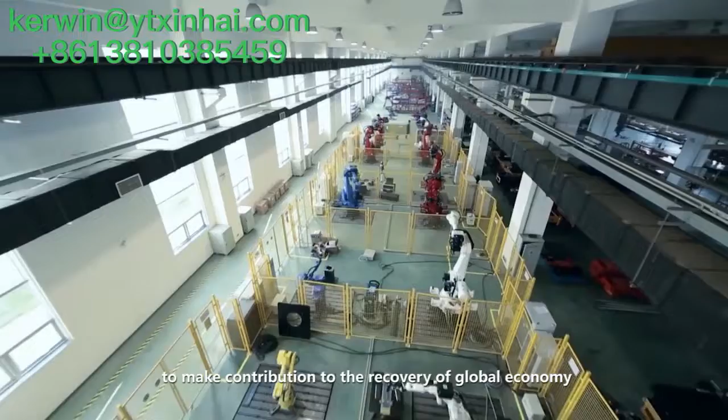The manufacturing sector across the world is continuing to make contribution to the recovery of the global economy. Shandong Xinhai Mining Technology and Equipment Incorporated is a leading player providing EPC services to mines in China. It has expanded its business to set up branches in a number of countries, such as Indonesia, Iran, Sudan, Tanzania, Zimbabwe, and Peru, offering tailored solutions to clients from over 90 countries and regions.

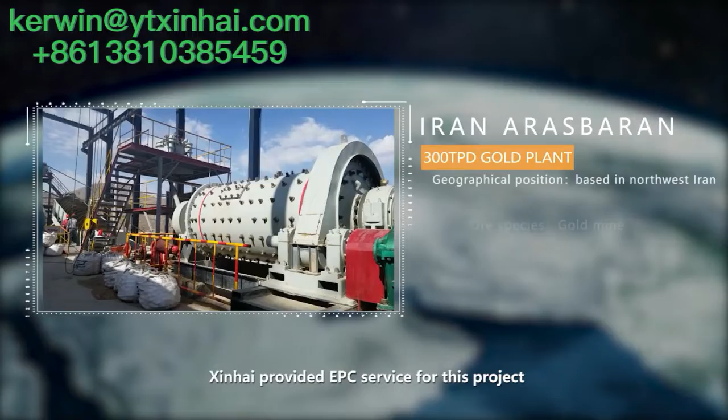Arasbaran Gold Mine, based in Northwest Iran, was one of the project's foreign clients who were fascinated by Xinhai's overall mine service system. Xinhai provided EPC service for this project, from mineral processing test, mine design, equipment manufacturing, package and shipping, installation and commissioning, to workers' training.

In a few rounds of talks, Xinhai's staff set out the project development to the client, including the mineral processing technology, construction conditions, project duration and cost estimation. Thus, the client comprehended how to construct the plant and generally knew the investments and benefits.

Through multi-element analysis and screen analysis on the client's raw ore samples, Xinhai Mining Research Institute recommended two technical processes: stage grinding, one-stage gravity concentration and stage flotation; and stage grinding, stage gravity concentration and stage flotation.

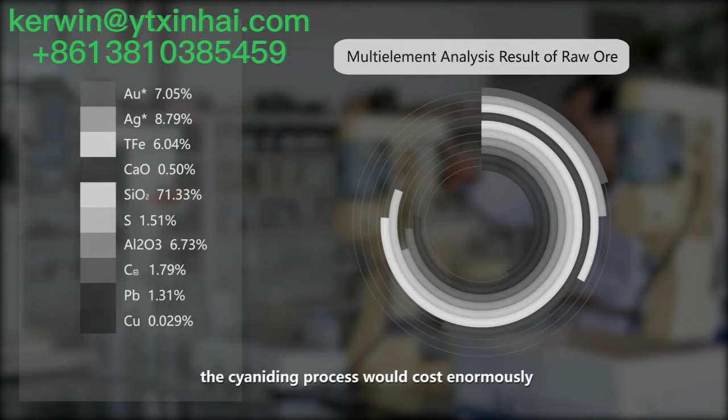As the ore of this mine belonged to sulfide ores, the cyaniding process would cost enormously. In addition, the use of toxic sodium cyanide would be harmful to production and environment. Compared with that, the flotation process could easily be handled and would use safe and environment-friendly agents.

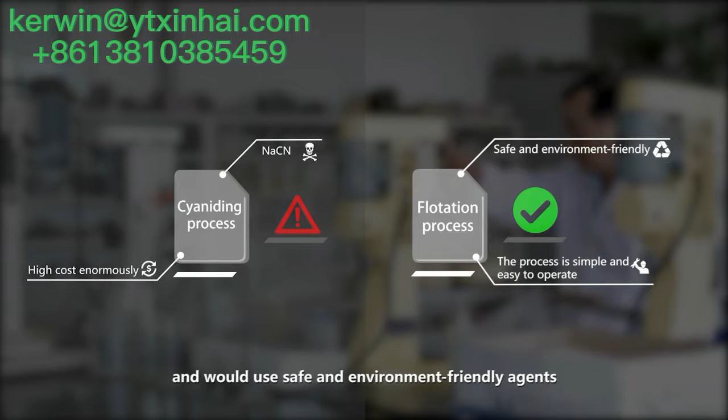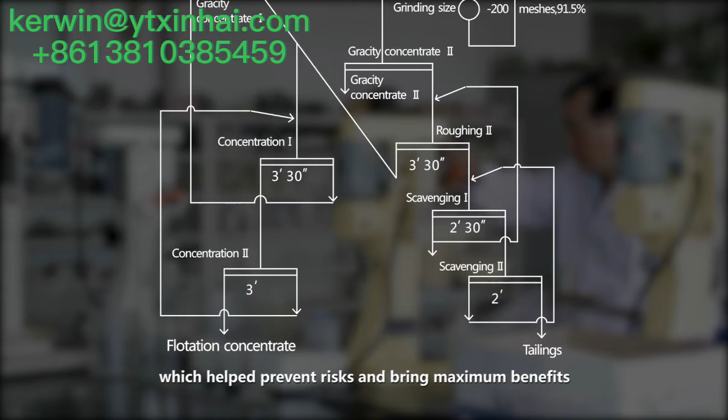As a result, Xinhai adopted the process of stage grinding, one-stage gravity concentration and stage flotation for the client, which helped prevent risks and bring maximum benefits.

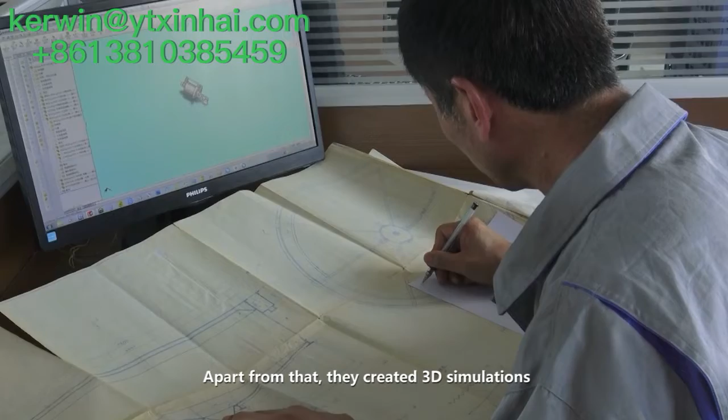To ensure that the mineral processing plant was in a perfect state, technicians of the Xinhai Mining Design Institute made strenuous efforts to design construction drawings based on the mineral processing flow, equipment model selection, plant terrain, and others. Apart from that, they created 3D simulations in order to offer proper mine design proposals and optimal industrial designs to the client.

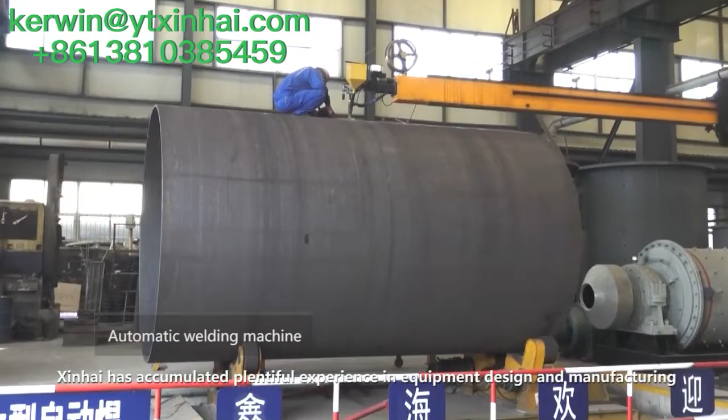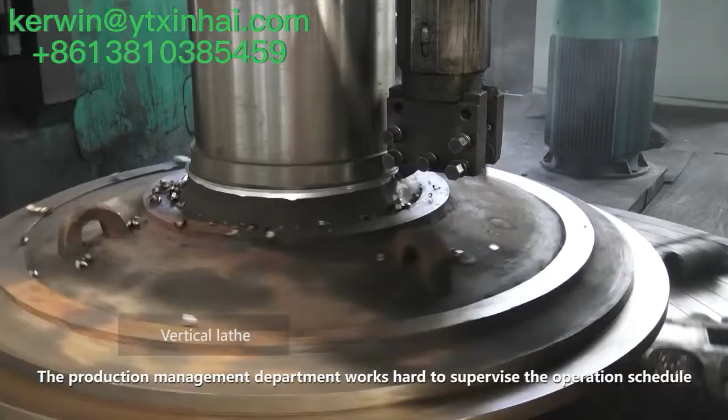Over the past 20 years, Xinhai has accumulated plentiful experience in equipment design and manufacturing, while growing at a steady pace and focusing on research and development. The Production Management Department works hard to supervise the operation schedule so as to guarantee high-efficiency production.

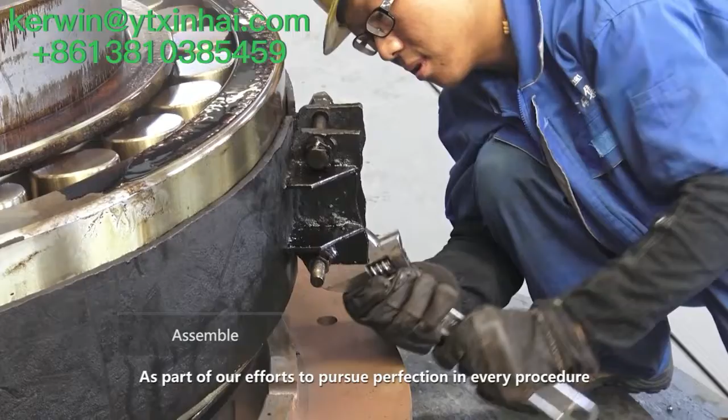As part of our efforts to pursue perfection in every procedure, all the metal materials entering the factory are treated by sandblasting and rust removal prior to manufacturing.

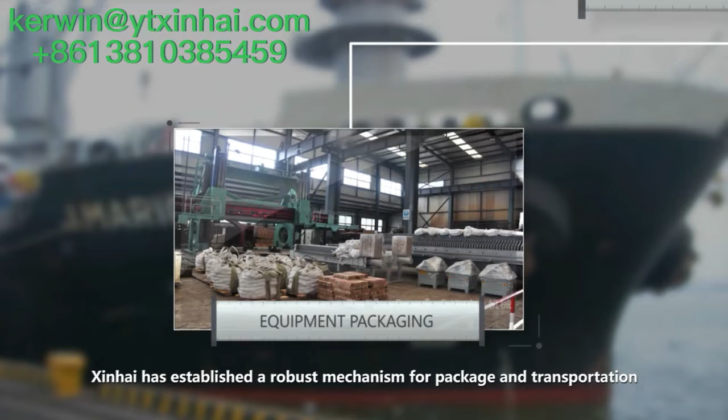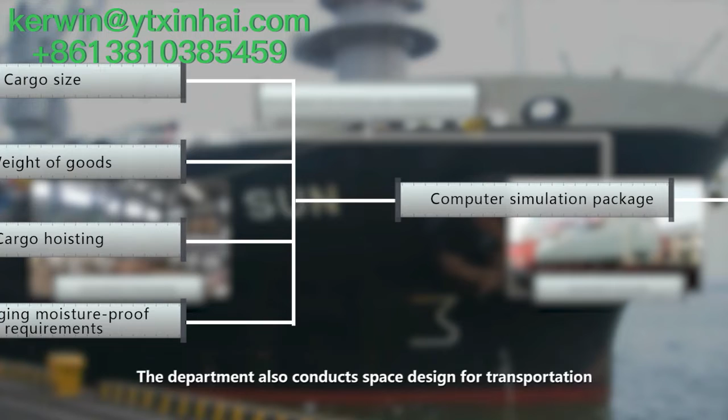Xinhai has established a robust mechanism for package and transportation. Its logistics department uses computers to simulate the condition of the package on the basis of size, weight, lifting, and damp prevention of cargoes. After that, the goods are sorted and packed. The department also conducts space design for transportation so as to reduce the transportation costs.

This ensures that equipment and spare parts are in safe and sound conditions, and facilitates field management and installation. Given the fierce competition in the mining industry, the success of Xinhai in keeping growing its business lies in its high quality and client-orientated services.

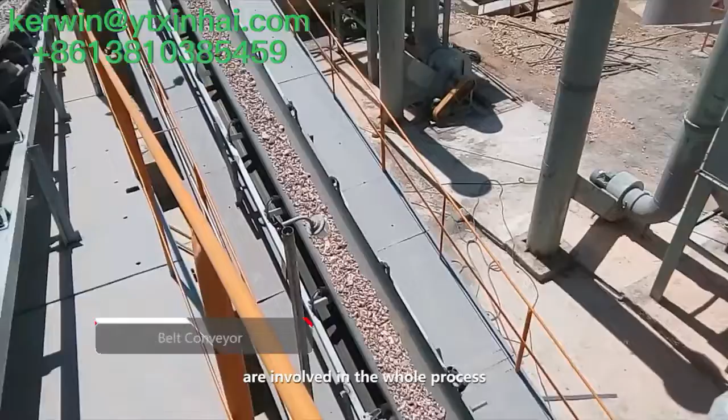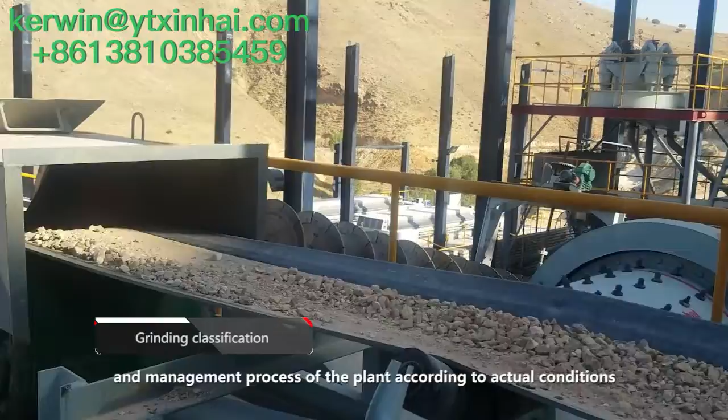On the plant side, the installation and commissioning staff are involved in the whole process. On one hand, they supervise and guide the works in relation to civil engineering and eliminate the potential risks. On the other hand, they improve the production and management process of the plant according to actual conditions, thereby delivering more economic benefits for the client.

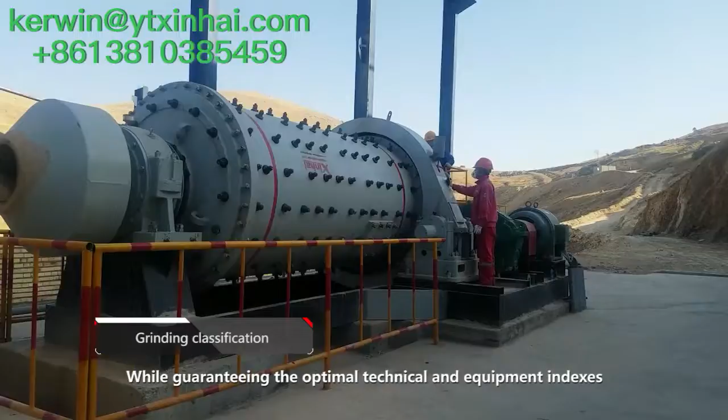While guaranteeing the optimal technical and equipment indexes, Xinhai also gives thought to what impacts the water supply and drainage system and the dust removal system may have on the environment.

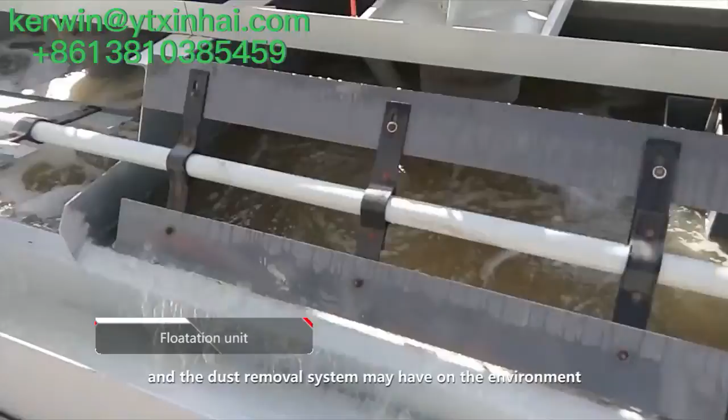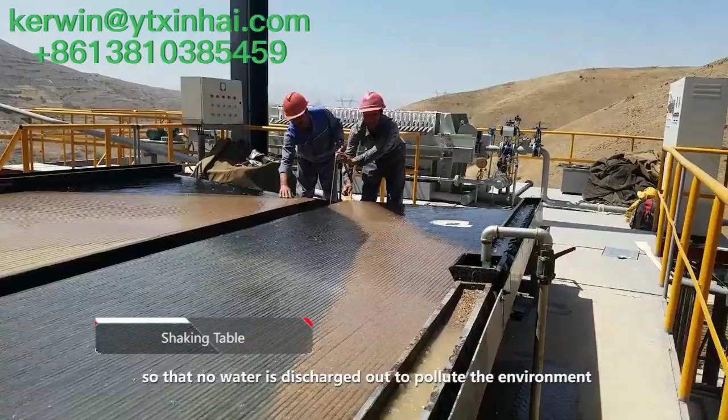First, backwater pipelines are designed in the plant for recycling so that no water is discharged out to pollute the environment. Second, to curb the spread of dust, wet ores are fed as far as possible, and spray for dust control is arranged in the area where dust usually occurs.

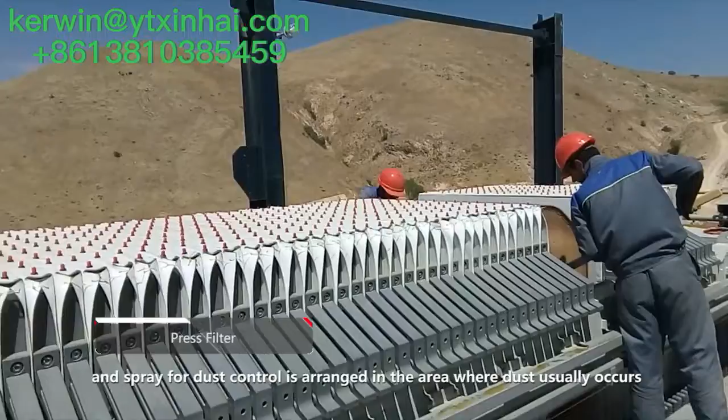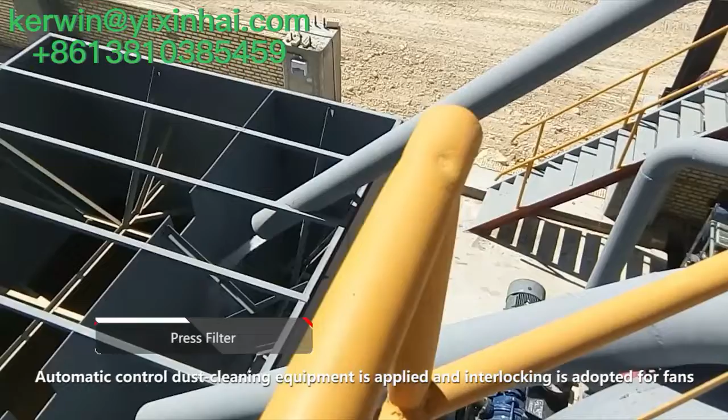Dust-proof enclosed hoods are also placed at each blanking spot. Automatic control dust cleaning equipment is applied and interlocking is adopted for fans and mineral processing equipment.

Xinhai sends its engineers to provide operation, maintenance and emergency training for the workers of the plant, so as to help clients build their own technical teams and guarantee normal plant operation.

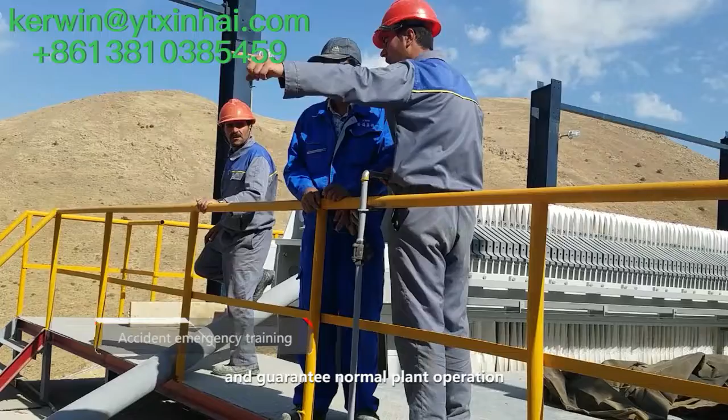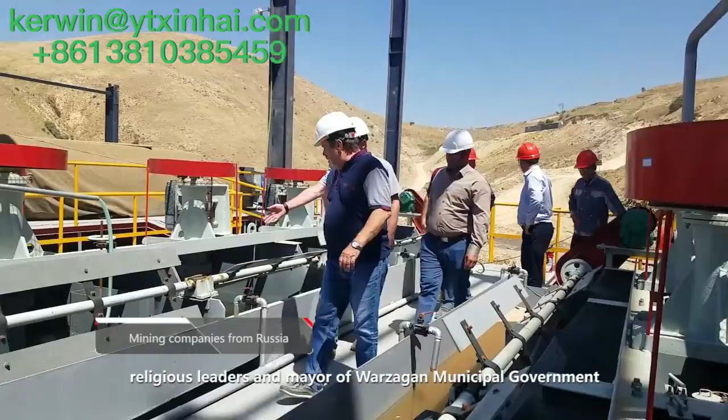Jafar Sargheini, Deputy Minister of the Industrial, Mining and Trade Ministry of Iran, paid a visit to the gold project and highly acclaimed the construction speed and quality led by the Chinese party. Among other visitors were the people's representatives of East Azerbaijan, religious leaders and mayor of Warzagan municipal government, and mining companies from Russia, who gave high praise to the plant layout, equipment quality and plant technology.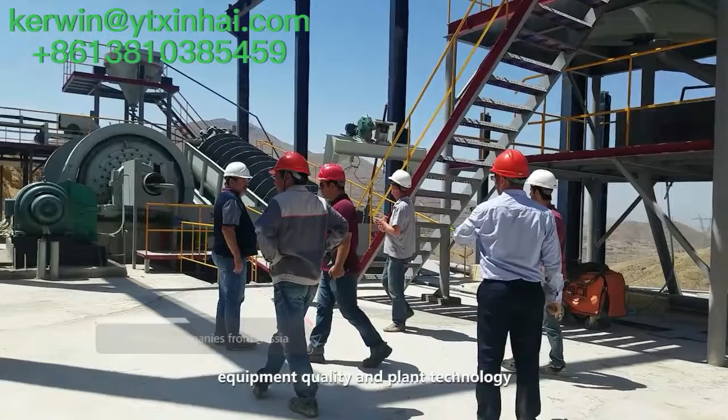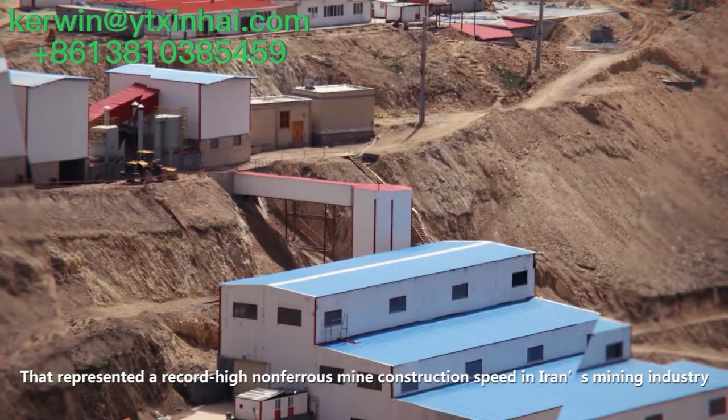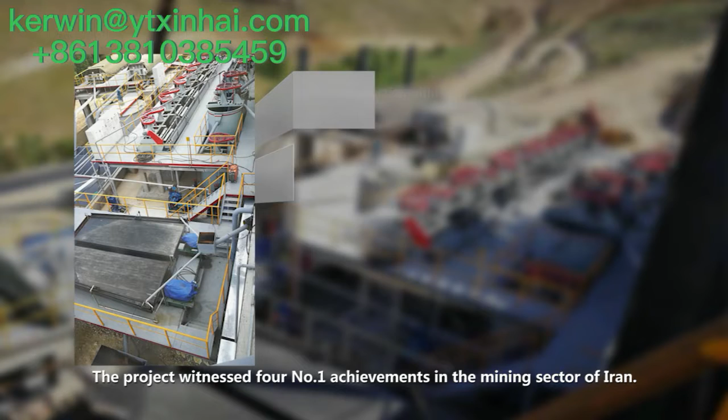The Aras Baran gold mine was put into operation merely 11 months since the launching of the project. That represented a record-high non-ferrous mine construction speed in Iran's mining industry, a speed recognized by Iran's mining circle as China's speed, along the One Belt and One Road. The project witnessed four number-one achievements in the mining sector of Iran.

Currently, with a daily capacity of 350 tons, the project is able to produce 5,000 tons of high-grade gold concentrates every year and register a considerable annual output value of 70 million yuan.

Xinhai has come a long way since it was founded in 1997. With its 20 years of experience in over 500 EPC projects, it continues to offer world-class EPC services to clients and create maximum values for them, while adhering to the principle of optimal solutions for your mine.